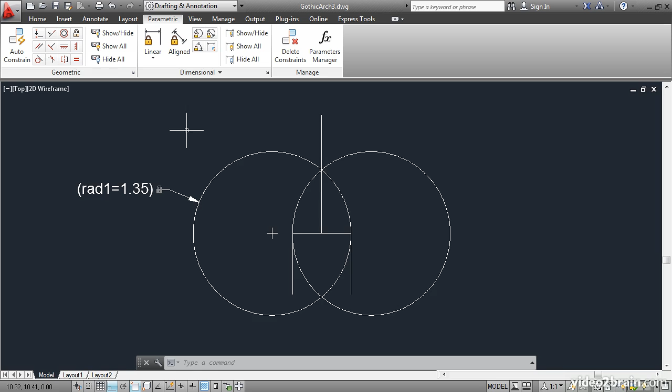geometry. Open the Gothic Arch 3 project file and select all the objects on the screen with an enclosing window. And then type B-Enter to execute the block command. Give the block a name, Ogive Designer,

and then pick a point for that block by clicking this button and snap to the midpoint of the horizontal line in the middle. Choose Convert to Block and Open in Block Editor and click OK. Notice that the geometric constraints are visible here by default in the block editor.

Now let's assign a new dimensional constraint within the block editor. This is going to be different than if we had assigned this outside the block editor, because the block editor will also create a parameter for us that will allow us to edit this as a dynamic block.

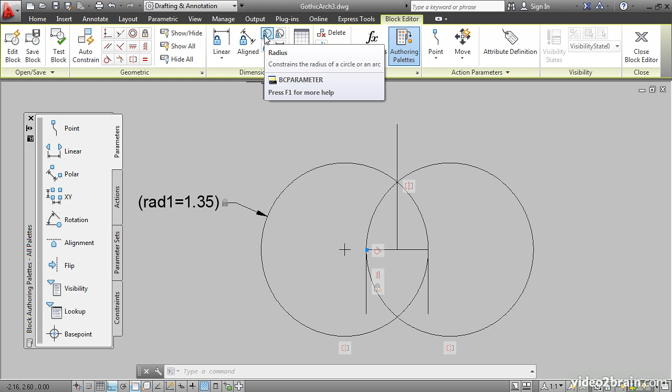So click this button to assign a radius parameter and constraint to the circle on the right. Select it, and then hold down Shift, right-click, and choose Quadrant, and click the eastern quadrant of the circle.

That creates a new variable called rad2, and it's equal to the current radius of the circle, which is fine. Press Enter to complete the command. You also get this grip right here, and this will be used to drive the entire system. So this is a dynamic constraint that can drive the whole system.

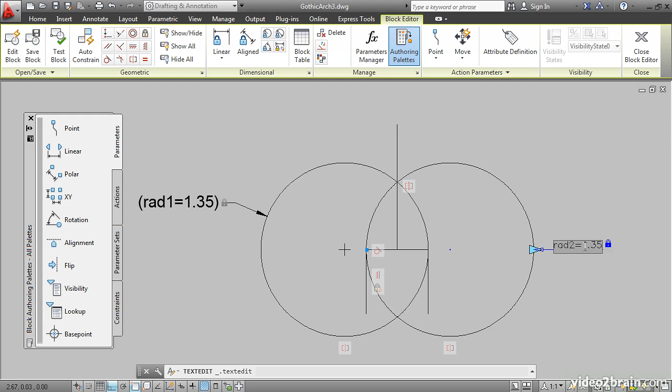To demonstrate this, I'll double-click on it, and let's change this value to 2. Enter. So it's driving the system. Over here we have an annotational constraint, which is sort of along for the ride, if you will.

Let's also hide some of these lines, which we don't really need in the completed dynamic block. Click this tool, Construction Geometry, and then select the vertical symmetric line and these two shorter vertical lines. Press Enter, and then choose the default option, which is Convert.

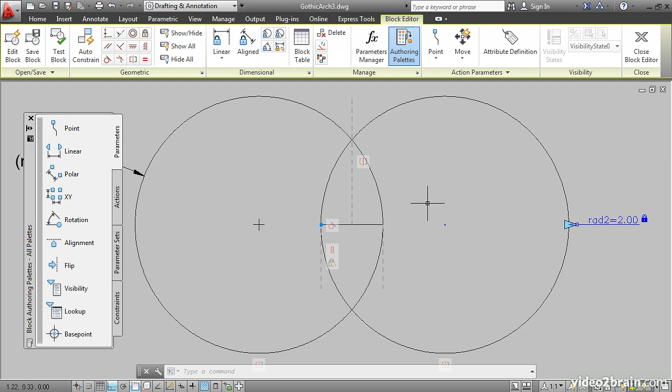They now show up with a dashed appearance here, and they're grayed out to indicate that these lines exist only inside the block definition. They won't appear when this becomes a block reference. Go ahead and click Close Block Editor and then Save Changes. It says it's not fully constrained, but that's okay. It will still work as we have designed it.

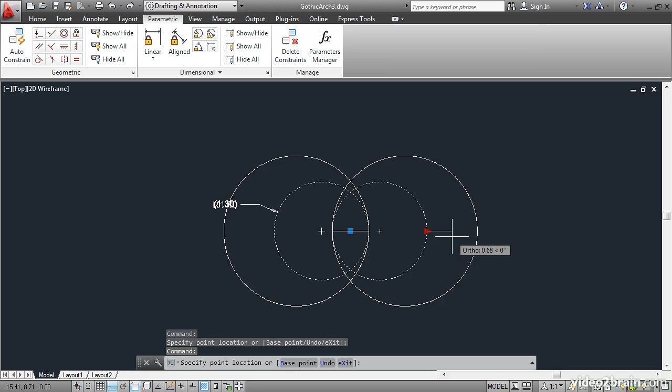Let's go ahead and see how it works. Click on it, and you'll see the dynamic block's custom grip on the right. Click that grip and move it, and you'll see that it works as intended. The circles scale together, and we get a different ogive shape as we move the grip left and right.

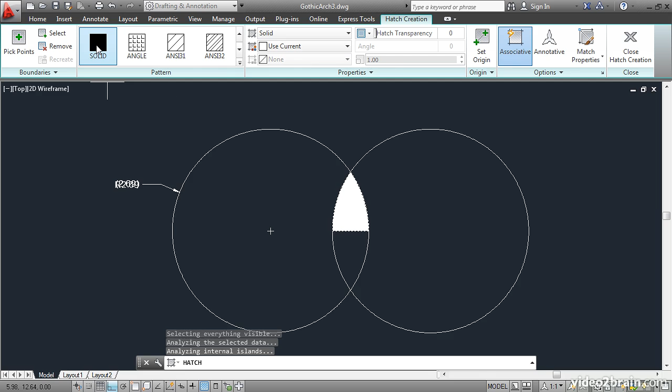Press Escape to deselect, and let's just add a finishing touch. Press H and press Enter to execute the hatch command. Click in this area and change the pattern to solid. Change the hatch color to green and click Close.

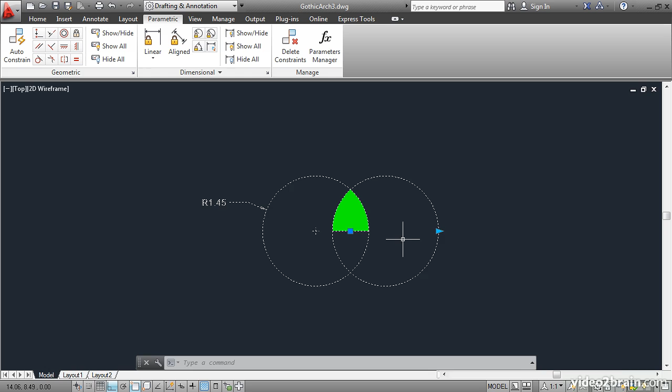Now let's go ahead and edit this again, select it, and move the grip. The hatch pattern is associated with the dynamic block, so it automatically changes its shape as we adjust the shape of the ogive. So in this lesson, you have learned how to drive a system of constraints using a dynamic block parameter with a custom grip. In this way, you have created a simple user interface for the exploration of the ogive shape.